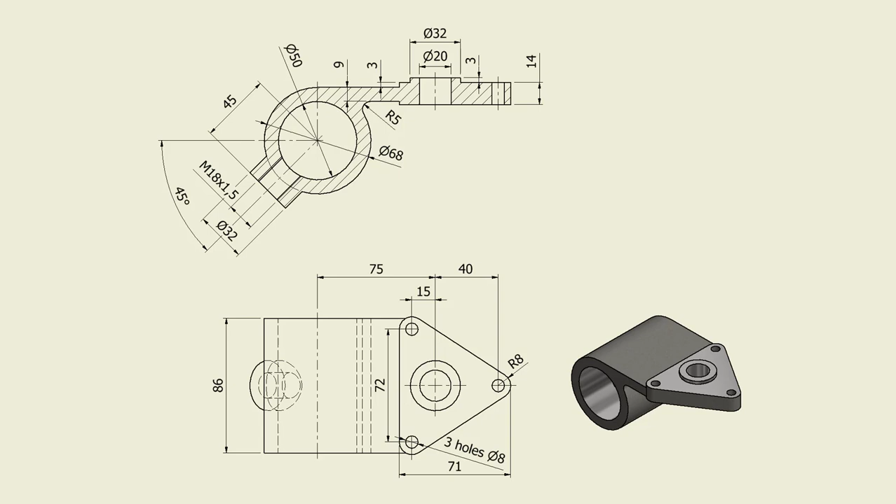Hi my friends, let's model part number 33, pivoting connection. You must know that part 34 is already presented in my first tutorial from this series, and it is also part of my collection of 100 parts.

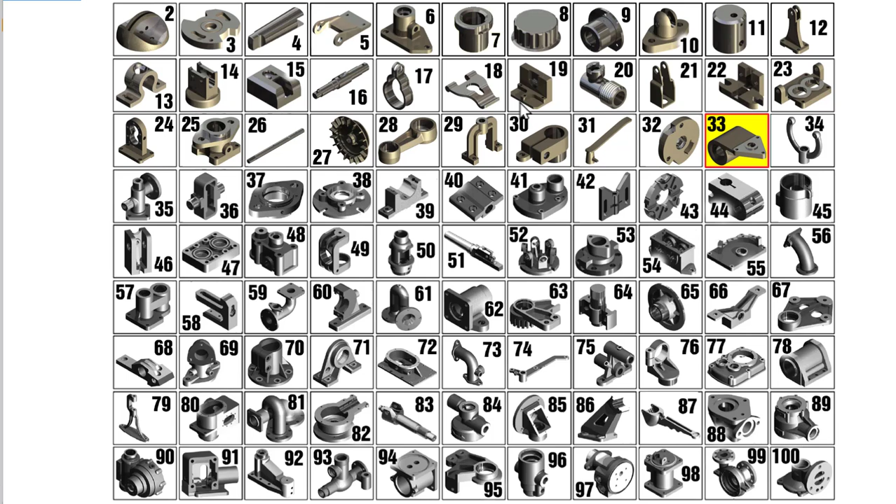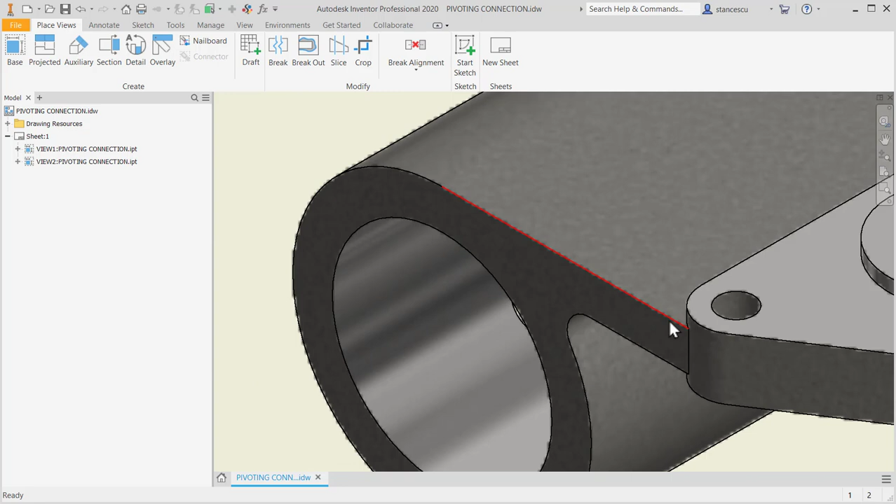So let's study the drawing. As you can see, this is a contour to be extruded, another one to be extruded, and then a triangular plate, not equilateral, with a flange which is both up and down extended, with a rounded corner. So we have to be careful with this extrusion.

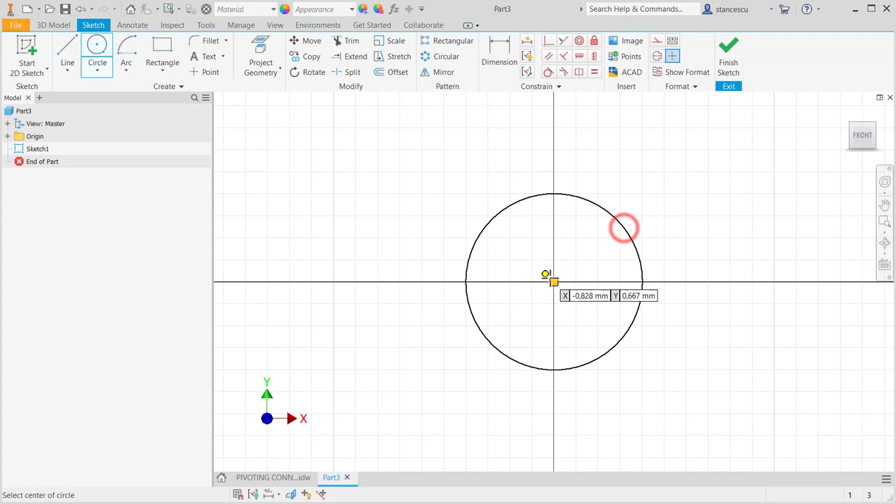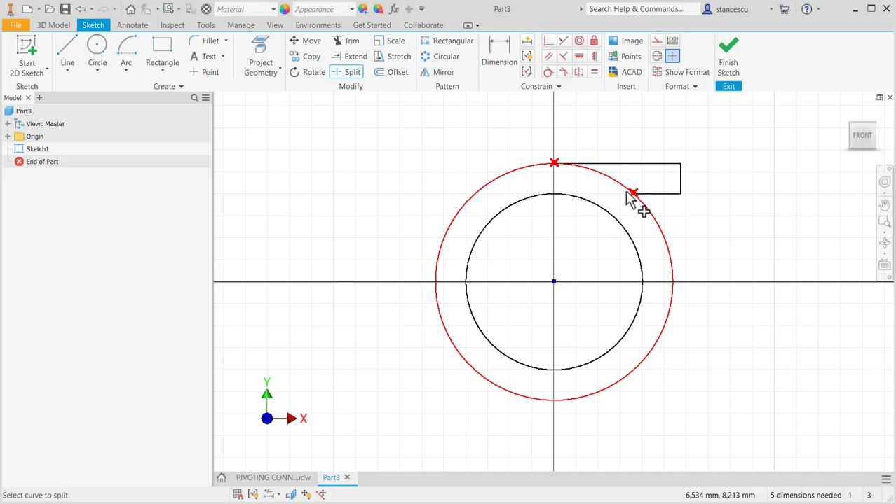Okay, let's start. We start with that extruded feature, which is like this. I apply split to cut the circle here and convert this to construction. Now dimensions.

External 68 diameter, internal 50, and this is with a thickness of 9. We'll see about this end, but I can tell you just now I'll use 75 minus 15 to have construction extrusion to this end, and then we create the flange and apply holes.

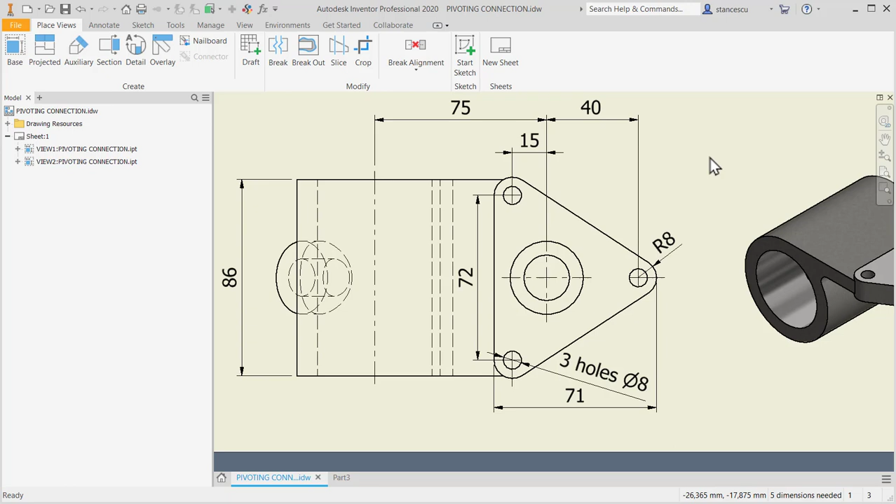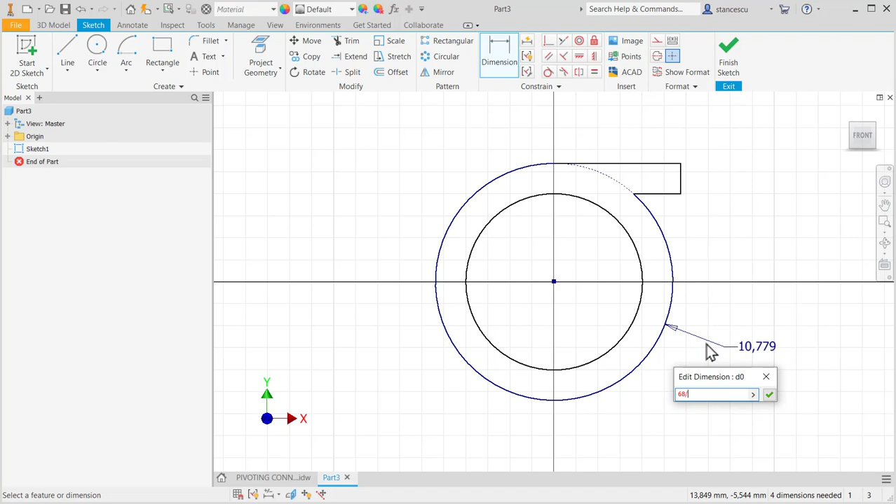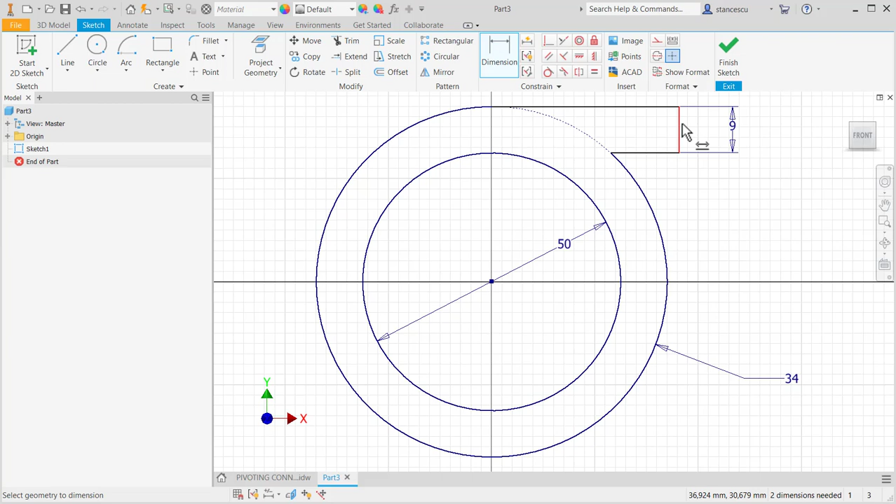Remember 68, 50 and 9, and here is 75 minus 15. Dimensions, this is a radius, so we have to divide by 2. 68 divided by 2, internal 50 diameter, not radius, and 9. And the distance to the center point is 75 minus 15.

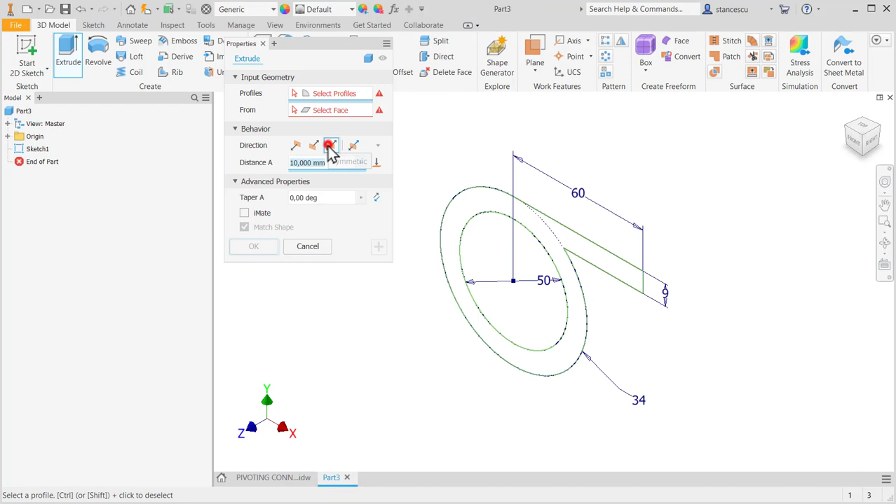Finish sketch, home or F6, extrude 86, symmetrical, this profile, symmetrical on 86. Okay.

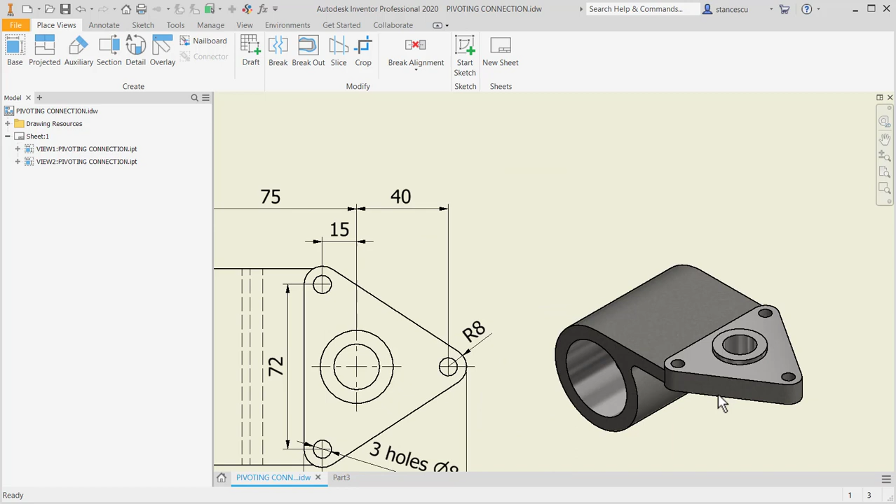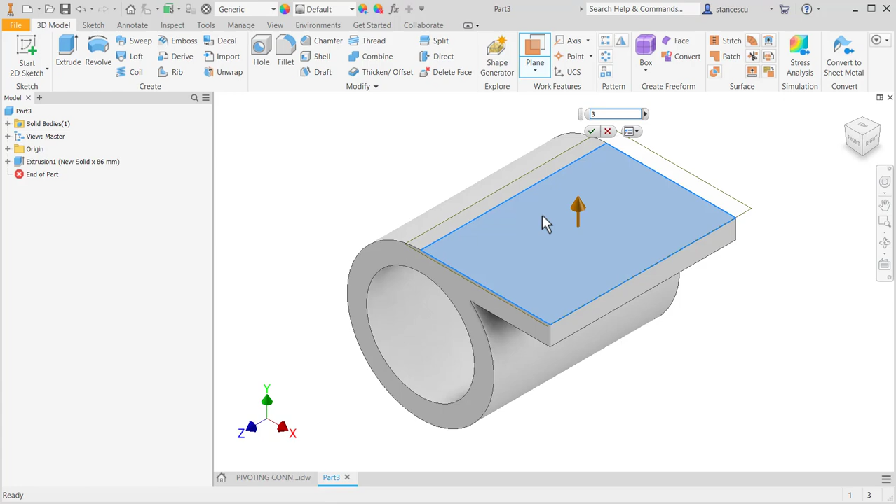Now we select a plane to create this flange. There is a distance of 3 millimeters between this plane and this plane. Look here. Yes, so we create a plane 3 millimeters up from here, 3 millimeters up from there. The sign is plus, not minus.

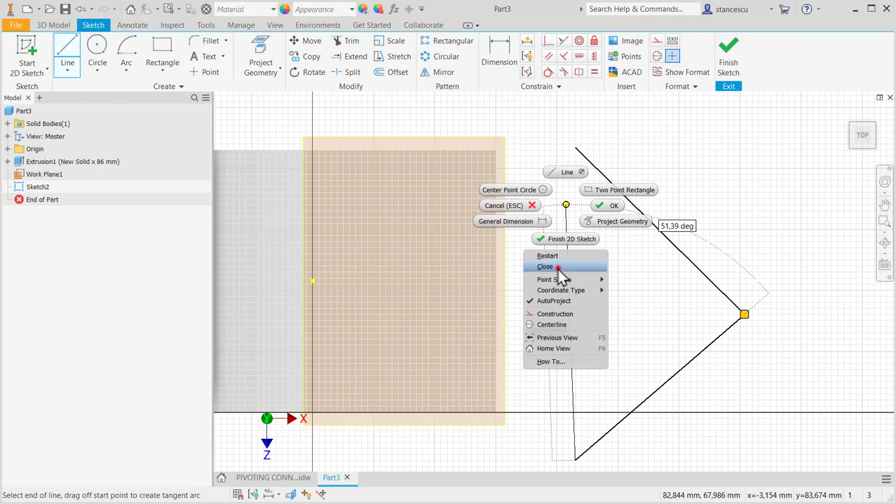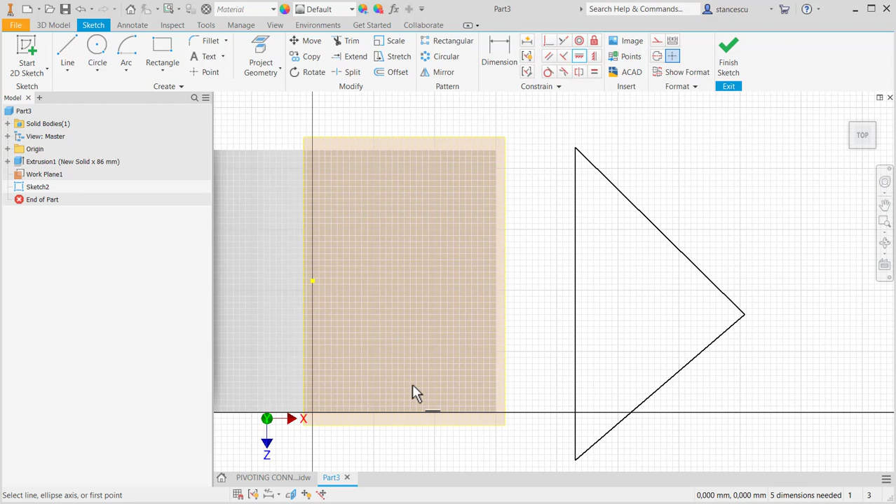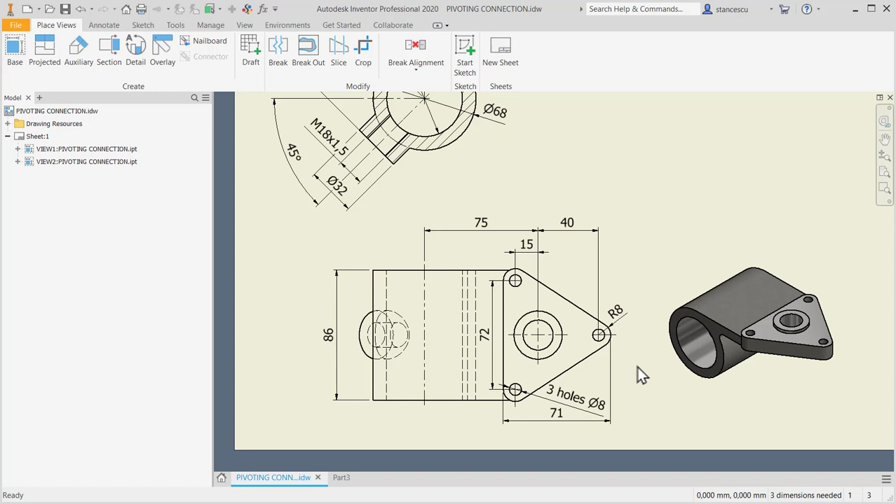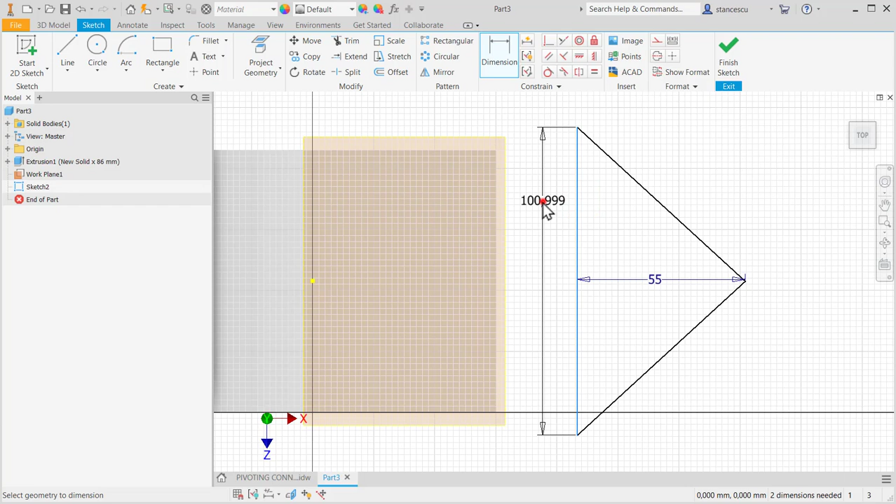Now let's take a look at the dimensions. I'll use the center dimensions and then create an offset of 8. 71 is from here, 71 minus 8 multiplied by 2, and 72. Let's go. 71 dimension, 71 minus 2 of 8, and 72 is here.

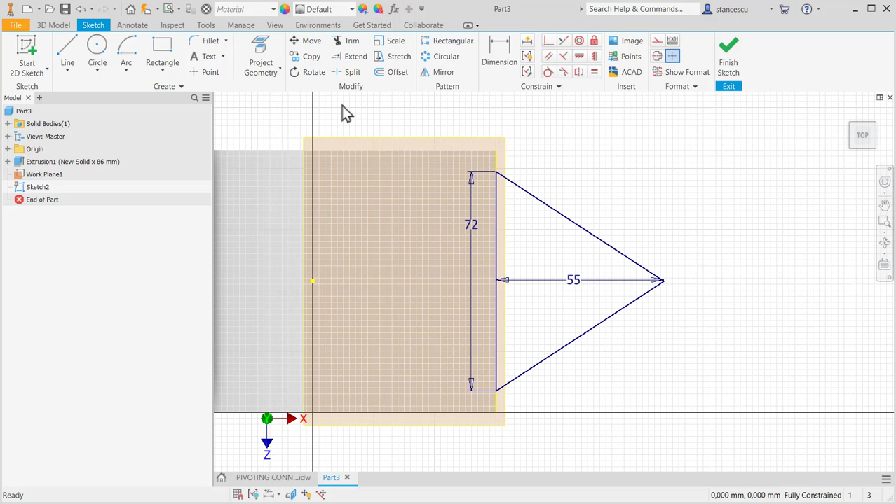Good. This line is collinear with this line. Yes, this with this. And now offset of 8. These lines must be construction, and we apply fillet of 8 to every corner.

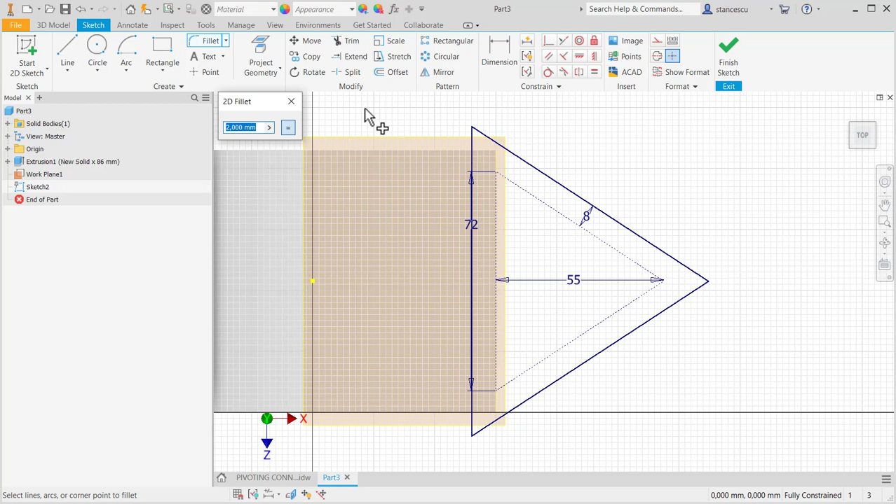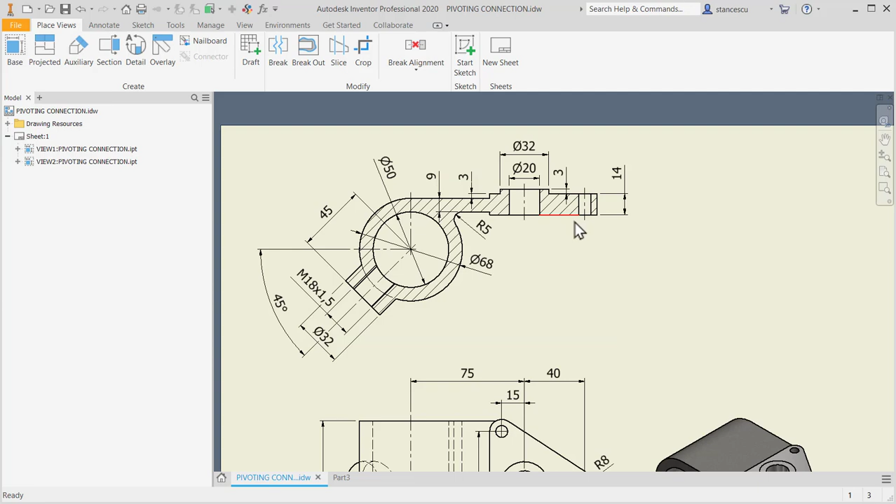Okay, finish sketch. The plane is no more necessary, and now let's take a look at the dimension. 14 from 3, yes, down. This is at 3 millimeters up, yes, the planes. And now we create an extrusion the other direction of 14.

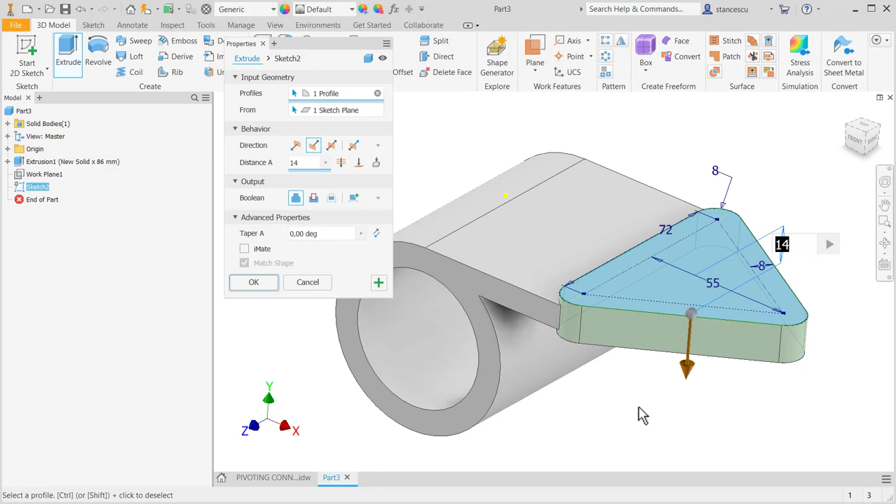Okay, everything is connected here, no gaps, no problems. Good. Now there are 3 holes. A sketch, a finished sketch. Holes, what diameter? 3 holes of 8 millimeters.

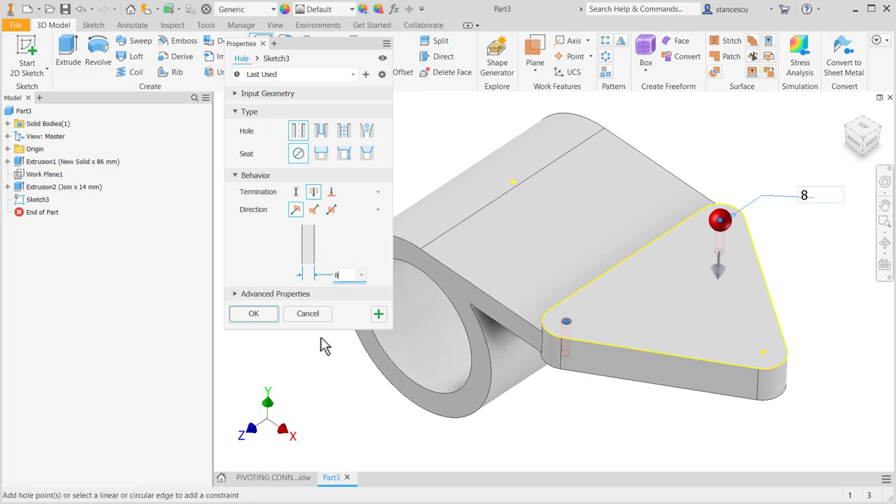This point, I'll show them one by one. Not metric, this is the diameter of 8 on every of these 3 points. Okay, through. Now there is a three millimeters extrusion of a circle.

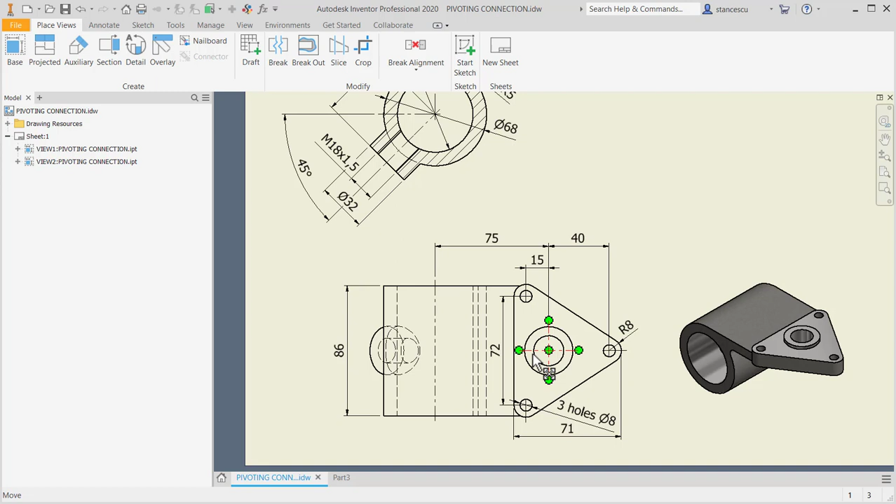Circle of the diameter 32, but where is it placed? 40 millimeters from this hole, 40. I create a sketch here with a circle with the diameter of 32, on the same horizontal.

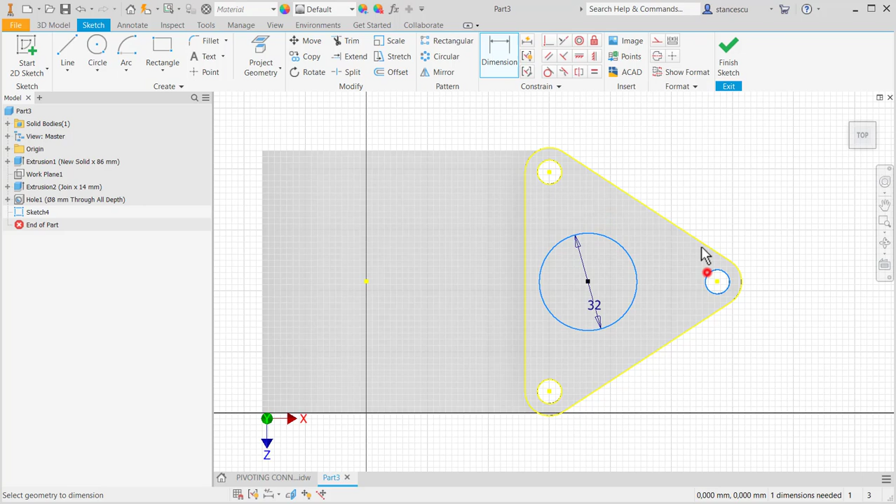This is horizontal with this point or this point at a distance of 40 from the right hole. Okay, extrude this at 3. Okay, then a hole of 20. Hole, this face, this concentricity, and 20.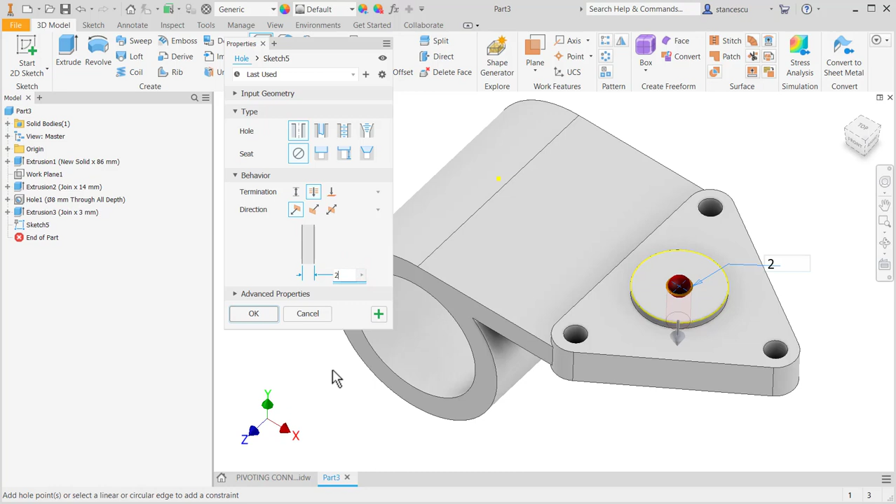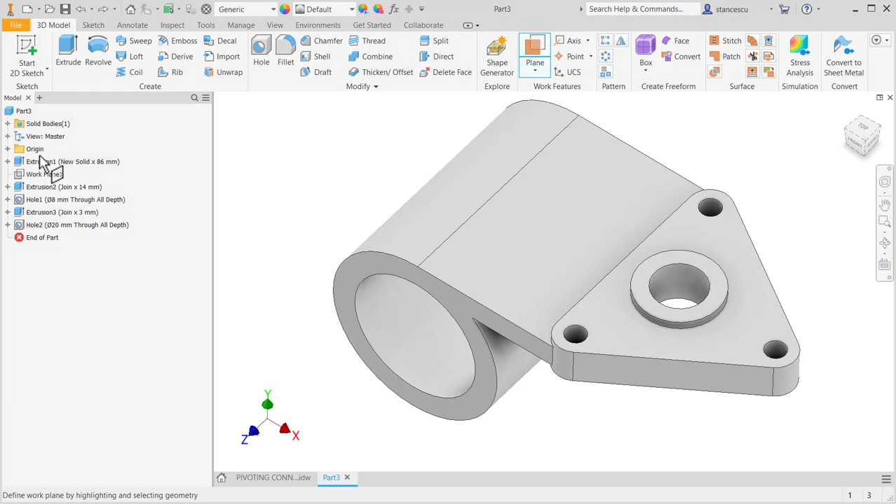All the way through. The last feature is this. I have to create a plane at a distance of 45 with an angle of 45. So I create that plane in 2 steps. The first one is to select this plane and this axis, Z axis. Then I'll place it to 135, which means minus 45.

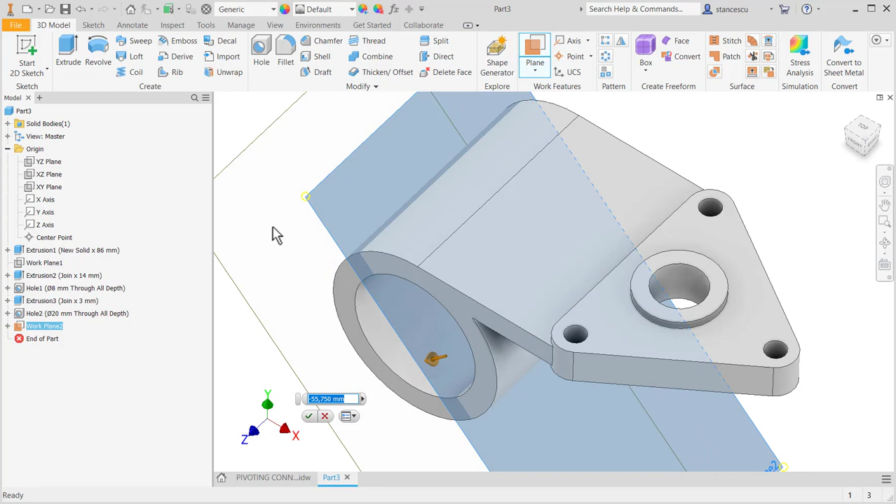I have to write the precise value of 45, not 135 and so on. I see the angle and I place the value. That's all. Be careful. And then another plane at minus 45. Okay, this is the construction.

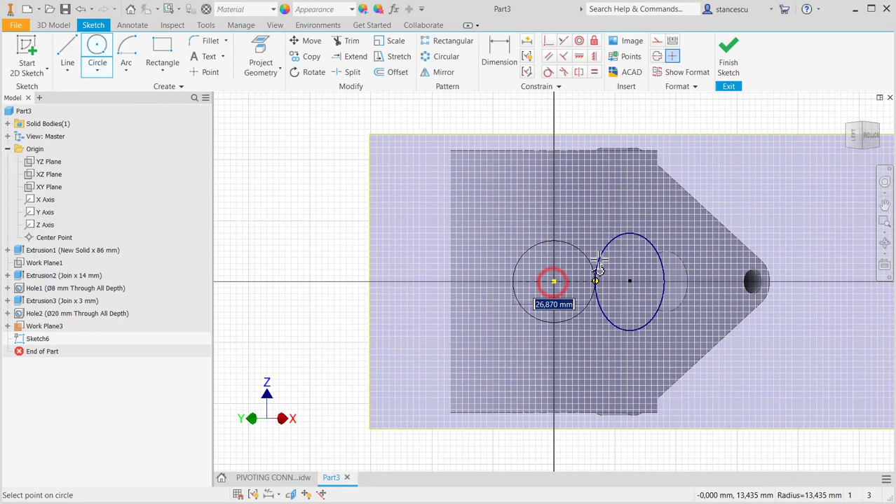This is not useful anymore, and now I create a sketch on the plane with a diameter of 32 to the part 32. Circle 32 diameter. Finish sketch.

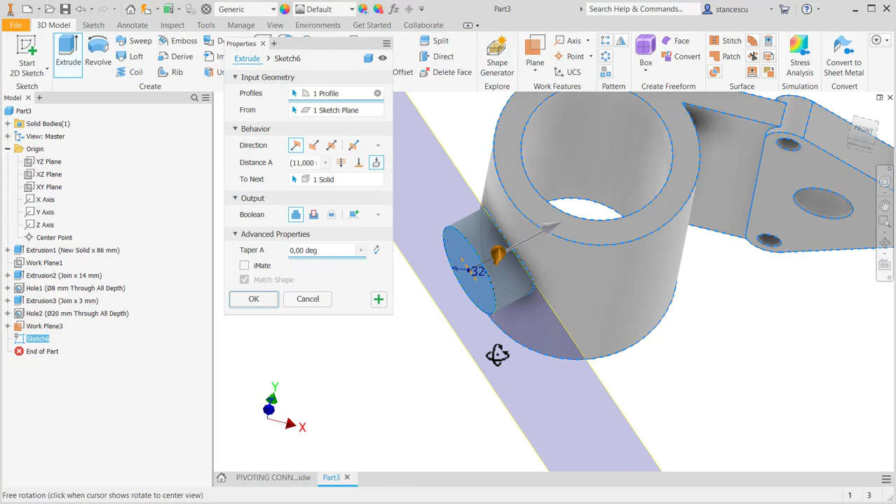Extrude to next surface, which means this. Yes, not more than this. Okay, this is not useful, but it remains.

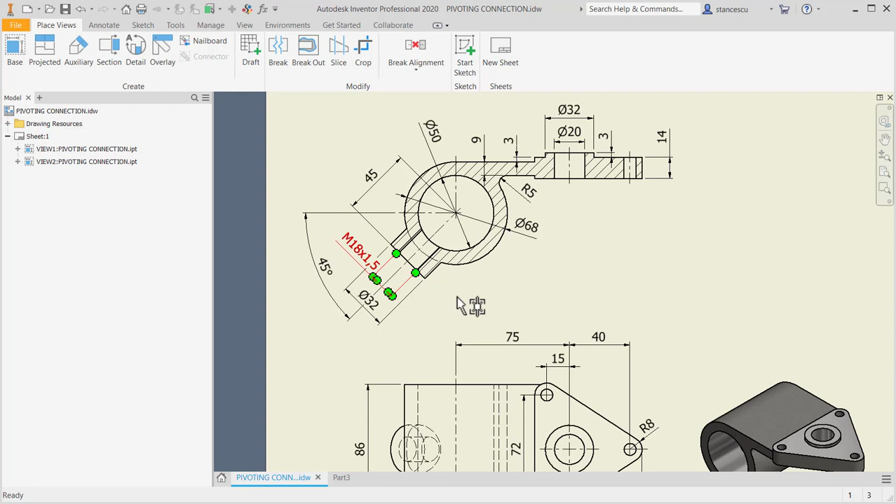And then the designation of the thread, metric 18 with 1.5 pitch. We use our tool with thread ISO metric 18 with a pitch of 1.5. This is not a normal pitch.

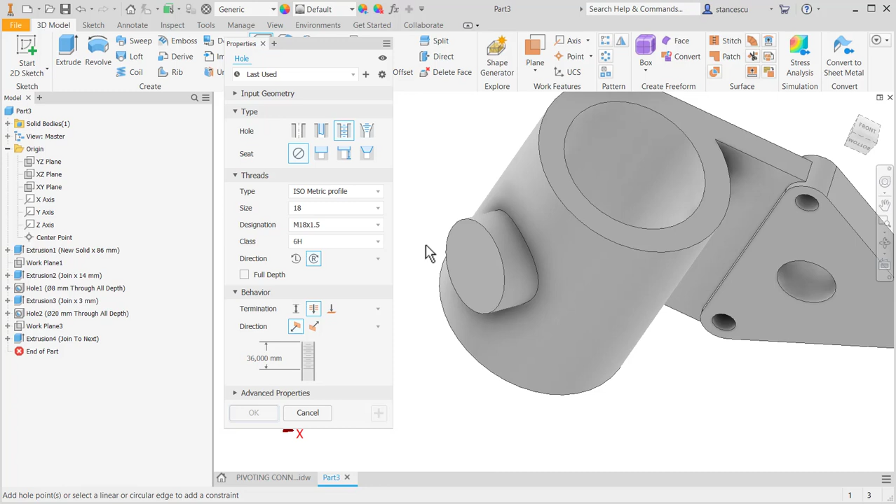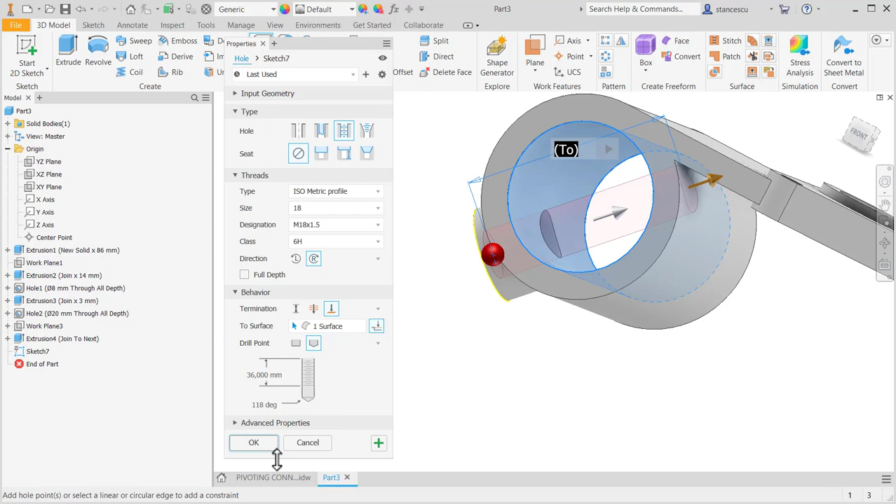When you don't mention anything here, this is a normal pitch, which is 2.5, but we choose a smaller one, this. Where to apply? Here. Which concentricity? This. And the end is to this face. Yes, we cannot choose this face because it is the same. Okay, that's all.

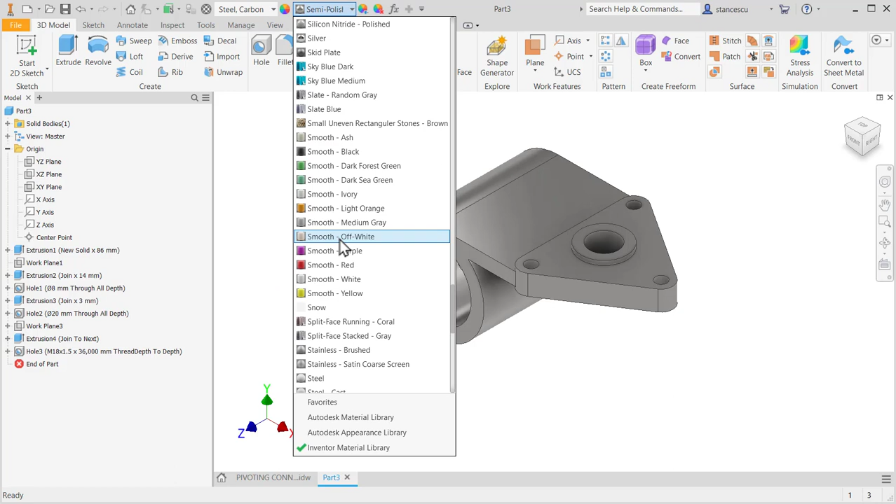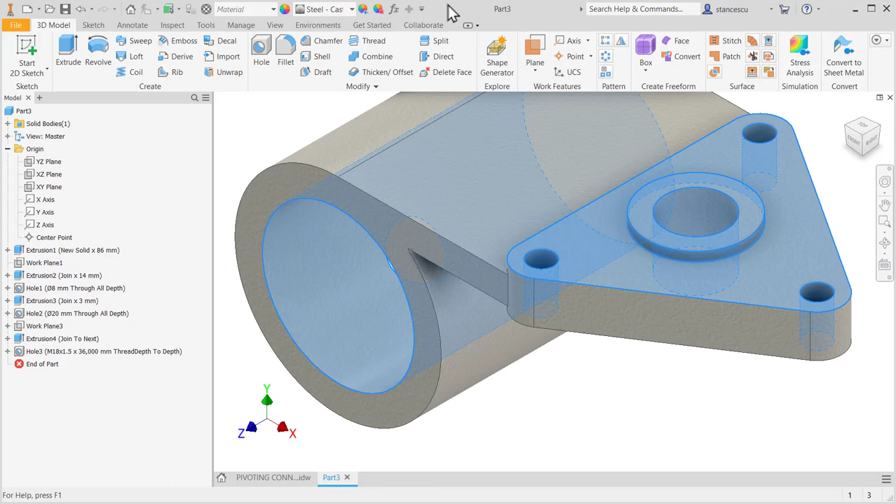F6. This is the part, my friends. Steel carbon with aspect of steel cast and some machined faces, all this. The thread is not machined, so I select polished. Yes. Oh, this face should be also polished, and also this face.

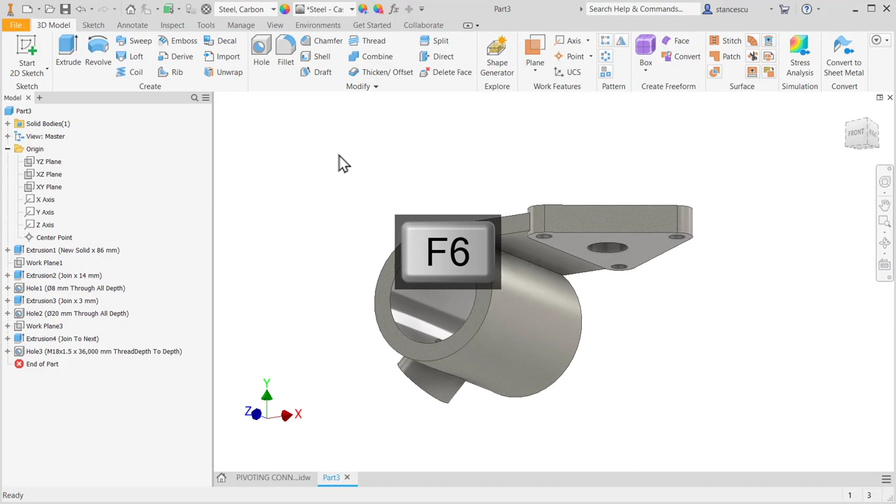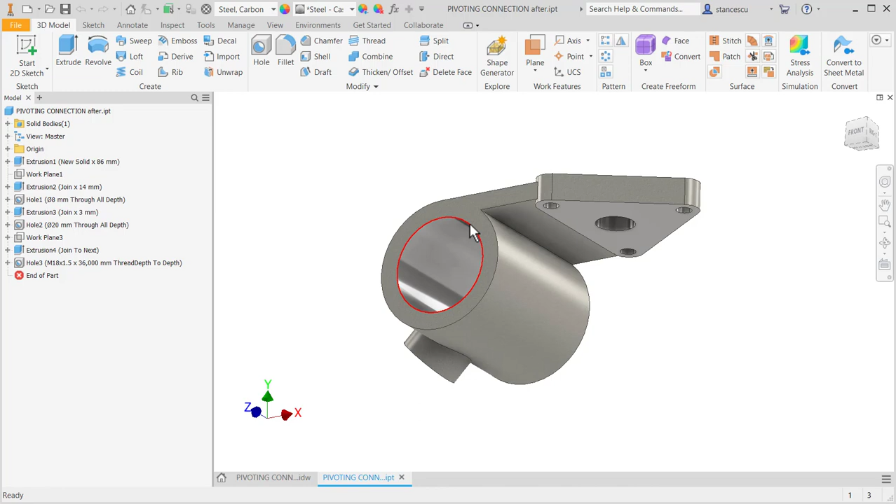Let's look again at the drawing, and we see a fillet here which was missing. We place that fillet of 5 millimeters, and then we take a look at the data. Update: 1.7 or 8 kilograms. That's all for the moment. Bye bye.